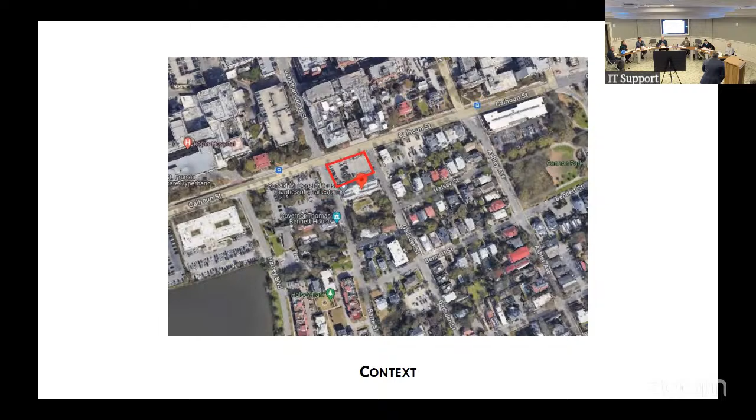David Bird, LS3P. We are working closely with HDR and the Department of Transportation for the modifications and widening of the Calhoun Street corridor for drainage. That's what it's being done for - also for safety on that stretch. That's actually the stretch right in front of our property, from Gadsden to Barre.

So there are some adjustments being made, and we can make the adjustments with them so that the sidewalks meet the TRC requirements, which is the city's requirements. There's one little area where we had a concern, but we're going to resolve it with them, so it should not be an issue for this, and it wouldn't change the design of the building.

The other thing I wanted to address before Thomas gets up to speak: the commentary at the last meeting revolved around really two items. One was the use of fiber cement siding, and the second was the level of brick detailing. We had scaled back on the brick detailing, probably overly so - there was a comment it was too much, so then we went back too far, and now we've brought it back to the level we think it needs to be, plus some of the activation on Calhoun Street and Gadsden.

So I'll just address the fiber cement. There's a materials board in front of you - we put a sample of the fiber cement here, these are the colors we're using, and then we put some example commercial buildings. I think there was a concern that it's not a material that's scalable to this size of building, so we found examples that show proof that it is scalable. We're also not using the siding in the normal way - it's not lap siding like you'd see in houses.

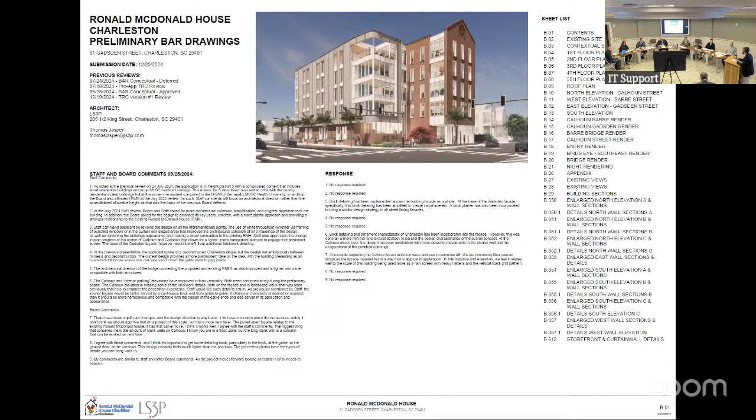Thomas Jasper with LS3P, architect on the project. Flip through to our renderings. As David mentioned, there were three overarching comments I think we focused on in refining and developing this design: the cementitious siding, the brick ornamentation, and the activation of the main streets - Calhoun, Gadsden, and Barre.

This image I'll use to go through how we further developed and refined the brick ornamentation. This is the corner at Calhoun and Gadsden - you'll see the previous design approved during conceptual to the left, and our proposed design to the right. We had cut this detail and brick ornamentation back a lot, in ways to focus more on massing and architectural direction, but also to lean more towards that postmodern character that is the campus of the Ronald McDonald site.

We agreed, and both the board and staff also gave us the directive, that it was a little bit too much. So in starting to develop and further that design, we first looked at the materials and what kind of brick we were going to use.

We used two strategies here. One, we looked to a tumbled look brick to relate more back to historic Charleston. Then we took that tumbled brick and applied it to the facade in a simple modular way, applying a more matched color to create a very simple mass facade. So it's much more textural - a traditional material being used in a more modern way.

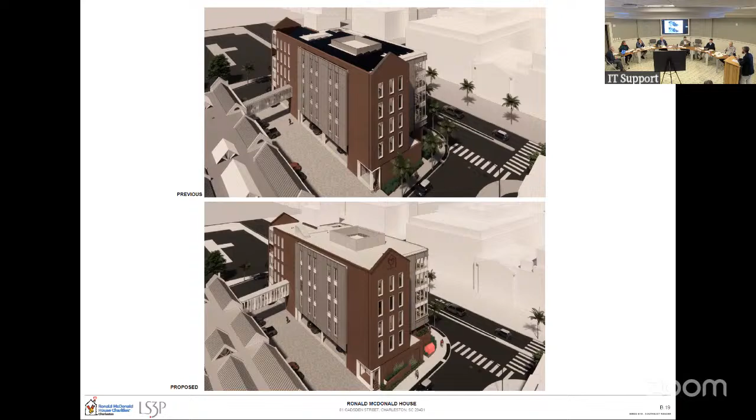This slide shows the two main languages and how they intersect. Next is the development of the bridge. I think we've covered most of the main comments brought up at conceptual, and we look forward to hearing what you guys have to say for the direction.

Questions? A couple. Yeah, go ahead, Mr. Banks. Thomas. Let's go to page B14.

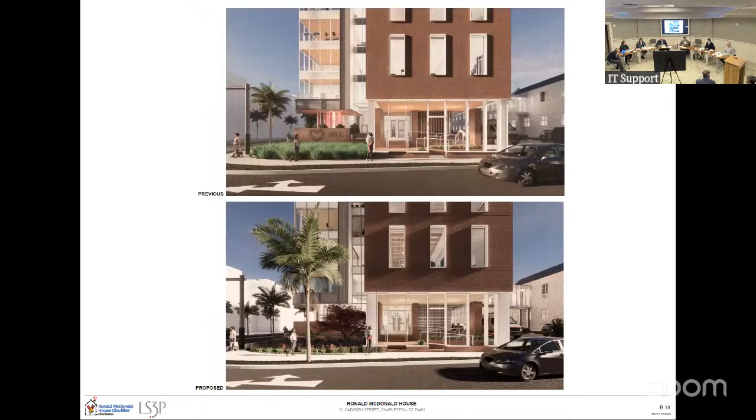I mentioned this at the conceptual review, but the emblem helps a lot at the top. But regarding the banding you added at the seal that wraps around the building, did you consider moving that up to where the gable starts? The emblem helps a lot, but when it was without the emblem in the previous version, it just felt like a tall plane there that didn't have a break where the gable end starts.

Yeah, I think I know what you're saying, where the spring point of the gable is. Would you do just a short return? I'm not trying to redesign it, I just want it to be something to consider.

We were actually talking about this earlier, maybe we could pick up on this banding. Because these windows are the same, and we have one that's got a little extra, maybe we could create some sort of double soldier course there. If you go to the next slide, it looks at it from the opposite side, same thing, very close.

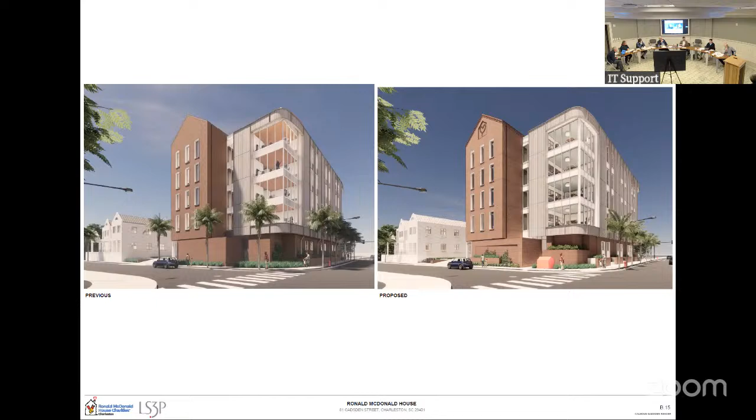I like the idea of it happening here. Can you go back to the other slide? What I like about this is it looks like the box is sliding out, and if we did the same thing here, it could stop as well and look like it just became the extrusion of the storefront. It looks like that used to be back here and it just came out, split out as a plane. That's a good thought.

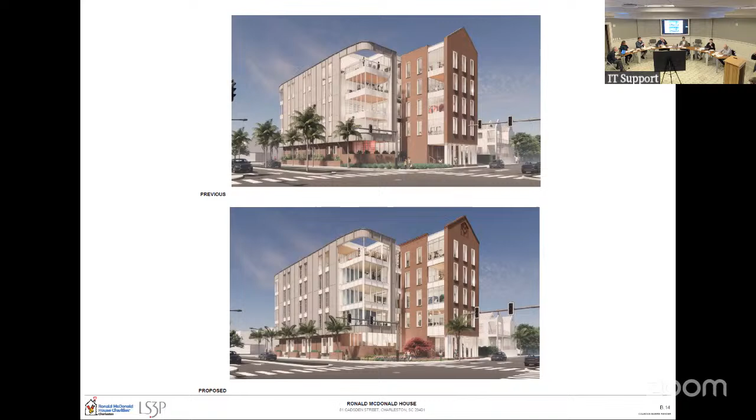On page B16, I was just wondering, because we eliminated the fourth window above, and by the way, I like the breezeway better, I think that's better, but I like the four windows rather than three. I'm guessing there's a programming reason why that had to happen.

We eliminated it at the top because that's where the stair wall is, so it didn't work out, but it could be spandrel at that floor and put back in the other places. Talking about the fourth window, the fourth column at the top, that's the problem, not the windows below in that column. But the problem is on the interior, and eventually we're talking about connecting to a future building at that location, the future phase point. So it's not a problem, I think we can put it back if you want us to.

Because the circulation of the stair is going to connect both buildings, and given that will happen sometime in the future, for right now that's a large section of brick wall that just gets left. At least that's what I think.

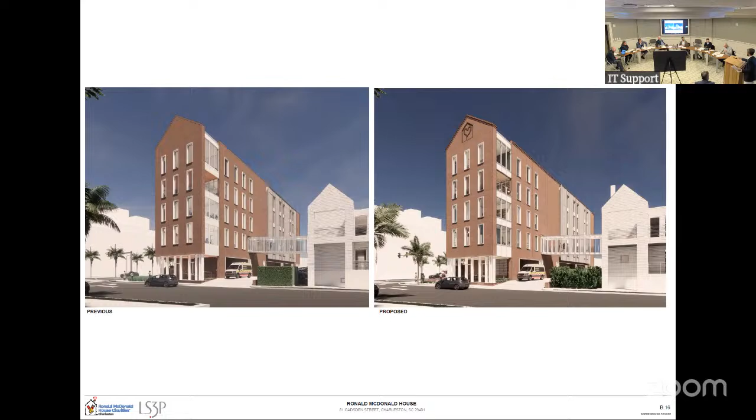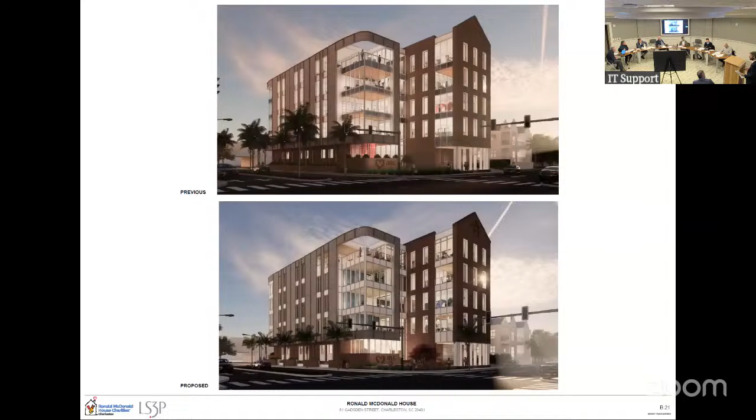Okay, and then if you could talk about what happens at the windows, where that detail dies into the windows. Talk about what happens at the floor levels where you have a horizontal joint. Talk about how you're going to make the round corner. And the wall section showed what looked like exposed nails, not sure if that's really the intent.

Do you know what sheet you're referring to, Steve? There was a drawing that showed cement panels with nails going into horizontal purlins. So is this the mechanism you were referring to on the base level?

For the battens themselves, we're looking to achieve those with a steel angle, then applying 2 5/4 battens that would protrude out from the facade. Those would be framing both in the horizontal and vertical, with a quarter inch reveal where that angle protrusion would occur for the sandwich. So from afar it appears as one, but it's actually modeled and rendered as two.

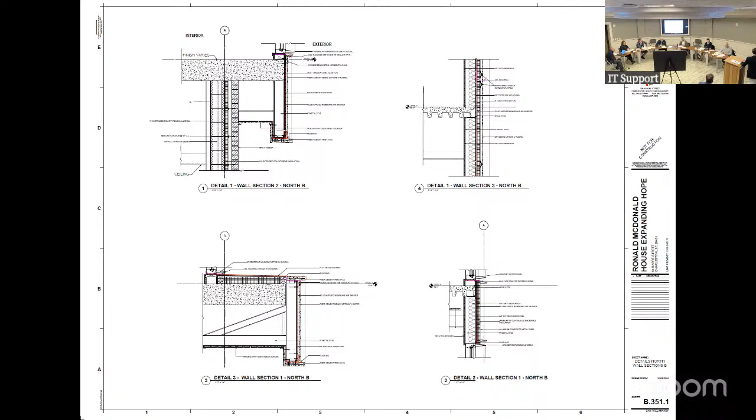Oh okay, you're speaking to the windows. Yeah, on both the storefront and the aluminum spandrel panel, YKK, Kawneer, and APCO make a mold cover that you can customize. So we're doing a custom mold cover that has that fin extension, and each spandrel panel would then have a fin to match. We're looking to mimic the look of a curtain wall in doing that.

In regards to your question on the field of vertical clapboards, we're using, and maybe it's detail 1 that was showing them, can you zoom in on that? Sometimes that's difficult to do in terms of what happens next with the computer, so I'm asking Lawrence not to. Are the nails concealed or are they not?

It's a V groove, basically a shiplap V groove, so the fastener would occur behind each of the laps, so they'd be hidden. Got it. And then that round corner on the nose, how is it going to be faceted, I guess? Correct, because I think it's either a 5 or 6 foot radius. So that's the point—does that work with the interlocking sections of that artisan channel and being able to rotate it?

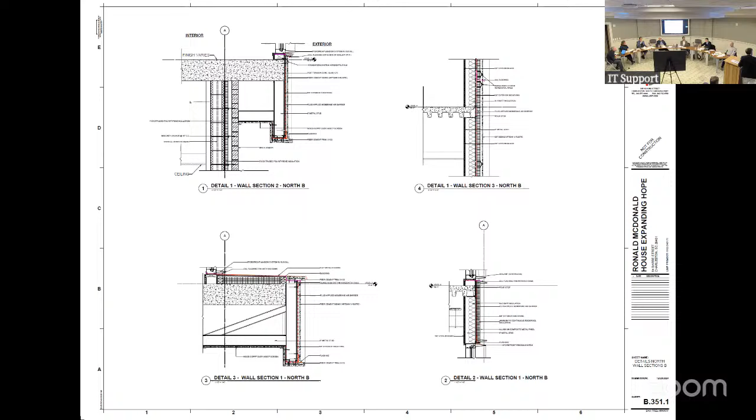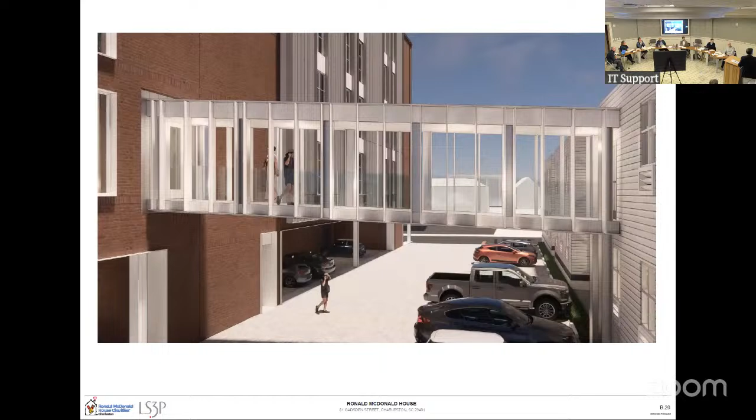Rendering's probably good, so the intent would be yes. I think if they could not achieve that, we could use a typical board and plug it, get the same look with just this view. I think they can extrude it at that radius, it's not like it's a big radius. That's what we're going to try to do.

And we haven't built this mock-up panel yet. I think we'll build a section of that to make it clear in the mock-up so we know what it looks like, because I want to know that it's going to work.

Well, thank you for answering those questions. Any other questions from the board?

One additional question too, if you could give us some insight into the materials and their colors, and how those were chosen, and how you feel they support or reinforce your architectural intent—basically the colors of the brick, the colors of the siding, and the colors of the panels.

Let's go back a little bit to the conceptual discussion. Originally all of the steel was black, and part of the comment was to make it more light and airy, more inviting for children. So the white steel relates back to the white facade of the existing building. Even the way the white bridge connects, it's almost more of an armature of the existing cutting into the new.

The brick relates back to the historic character of Charleston and also just something new along that facade. It also draws some connection to the MUSC campus just to the north, which is all red brick. The gray facade relates back to the gray metal roof of the building, creating a cohesive color palette for the overall campus, with the brick being the one kind of outstanding element.

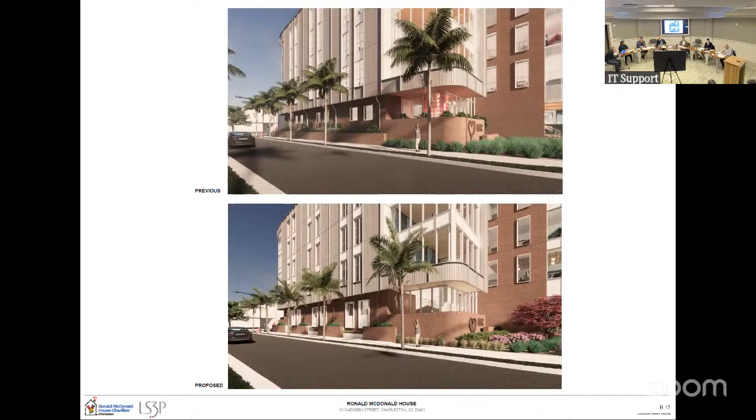Sure. Our first comment sort of repeats what the applicant has already said, which is that at the September conceptual approval, the applicant was asked to restudy the Calhoun and Gadsden Streets experiences relative to the blank walls for more detail overall, particularly in the brick areas, and to reconsider the use of cementitious siding.

Staff support the restudy of the Calhoun and Gadsden street level facades and experience. The planter boxes on both provide a good rhythm to the street experience, and the addition of soldier coursed inset panels on Gadsden also adds visual interest. Staff support the use of soldier course banding on the various brick facades to add interest, but not interfere with the overall vertical reading of the elevation.

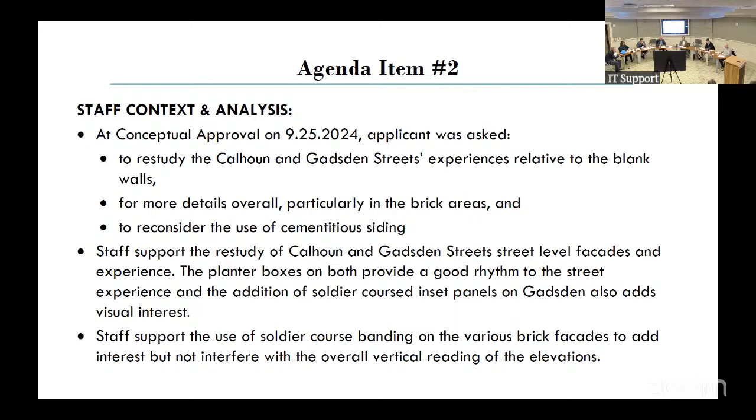Staff support the additional detailing at the cornices of the gable facades on Barre and Gadsden Streets. They provide a clear finish at the top. At the bottom of the brick gable facade on Barre Street, staff recommend adding banding or equivalent finishing moment.

The windows on Gadsden Street gable elevations are not evenly spaced. There is a larger space between the first and middle column of windows than between the middle and third. Staff know this was true at conceptual as well, but neither staff nor board commented at the time. Staff prefer that all windows are evenly spaced on this gable end, as they already are on the Barre Street gable facade. The south elevation previously had 4 columns of windows, as mentioned by Mr. Metters, at conceptual, and the current proposal has removed the windows that sit in alignment above the bridge. Staff prefer the previous iteration, which helps alleviate extended blankness on this facade.

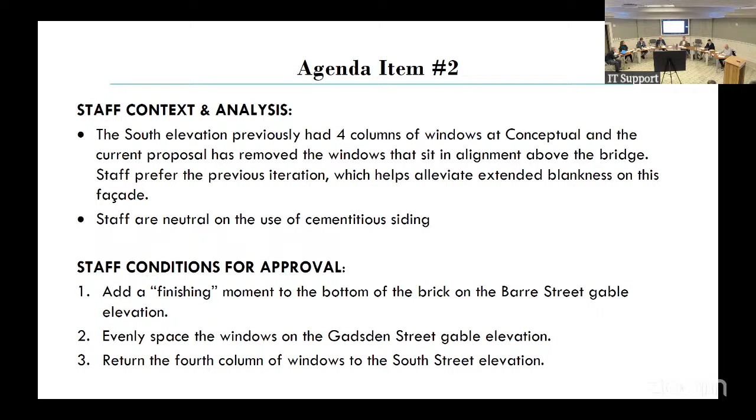Staff are neutral on the use of cementitious siding. Our conditions for approval would be: 1, add a finishing moment to the bottom of the brick on the Barre Street gable elevation; 2, evenly space the windows on the Gadsden Street gable elevation; and 3, return the 4th column of windows to the South Street elevation. Staff recommendation is for preliminary approval with board and staff conditions, with final review by staff. Thank you.

All right, any response from the applicant to those comments?

You'll step to the podium just so that they can catch you on YouTube. I have no problem with staff comments. We agree. We didn't even realize it's off a little bit on those gable end windows. We'll fix that. We can add the 3 windows back.

Thank you. All right, it's now time for board discussion. Does anybody like to start? I'll make a motion if any, unless somebody has a comment. Hearing none, go ahead.

I think the only thing I would probably bring up, and I think it's something to be resolved at final too, is with cementitious siding in its vertical orientation and ending of the board, the continuous length is nice. But what we've found sometimes is that it does highlight the flashing and drip edge lines, and brings in an element that's usually meant to be concealed, exposed. So I think as it moves forward into finalizing those details and mock-up panel, that should become a condition, that we kind of make a note of that if it creates an issue for someone.

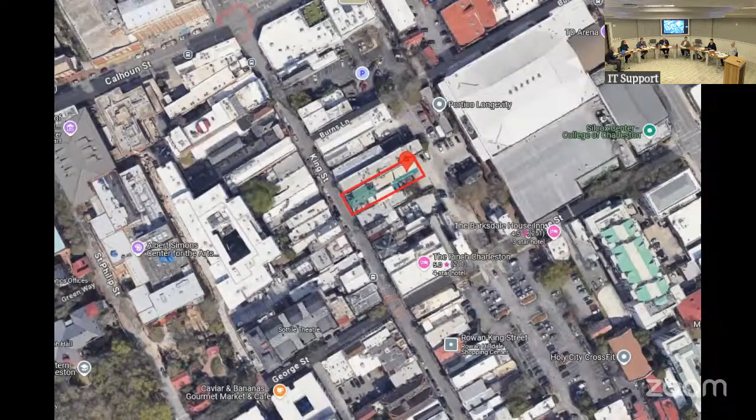All right, our next item is 348 King Street. It's a category 3 building, circa 1900, in Height District 3 in the Old and Historic District. The applicant is requesting conceptual approval for the construction of a new exterior storefront and vestibule. This just locates us where we are on King Street, and then we'll be ready for the applicant presentation.

Thanks for having me. My name is Olivia Lau from Height Architects. We are the design architect for the new tenant going into this retail space at 348 King Street. Attempt to use this. If you point it this way, it's the laptop. Oh, okay, yeah, there we go. As long as it's in this direction, it's usually okay.

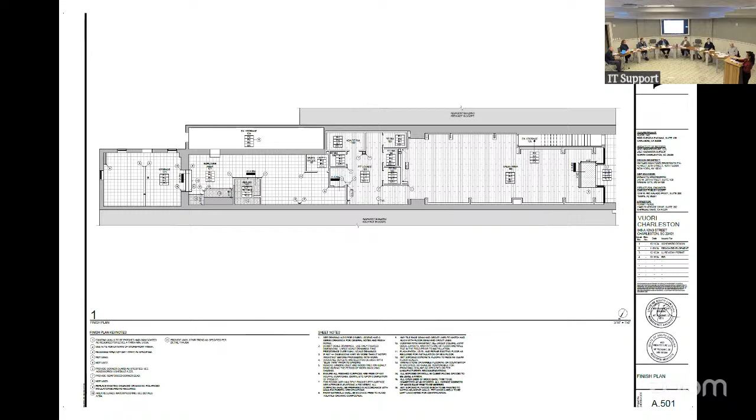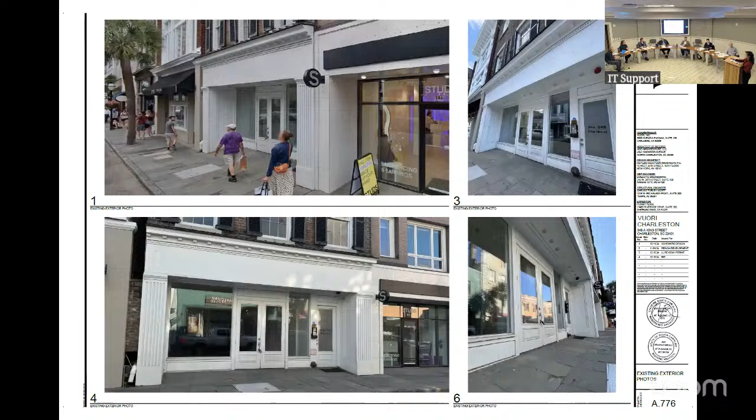Just trying to get to the context of the store on the street for you guys. This is the existing context on King Street. You can see it's one of the main commercial streets here in downtown Charleston. The current facade is in a sort of neoclassical style with cornice detailing, wood paneling, fluted pilasters. And so the existing grade, as you approach the entrance, as you can see in the lower right photograph, is quite a severe slope compared to the other stores along that street.

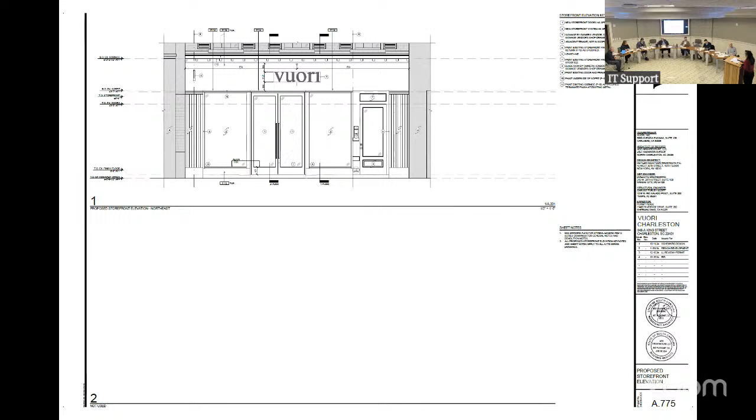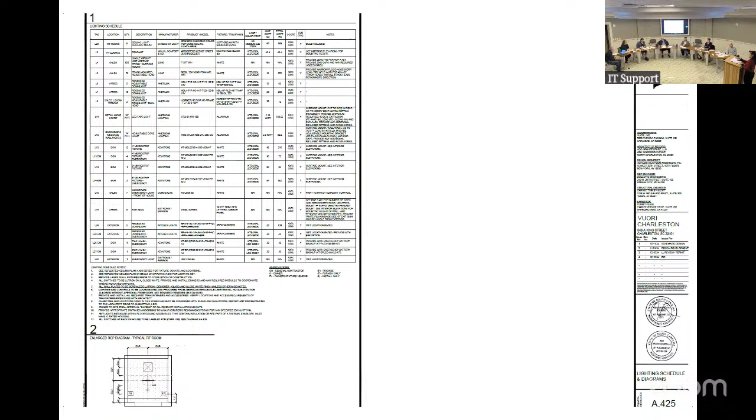Our proposal is to essentially refresh and improve the facade for the retail store. What we're proposing is to install a new off-white metal storefront, glass and entry doors, and new lighting in the vestibule soffit. We would push the entry doors back a little further from the property line to improve handicap access and provide an ADA-compliant slope up to the entry doors for customers. With the new storefront, we're also looking to improve energy compliance by installing insulated glass, and improve the durability and maintenance of the entire storefront with metal finishes at the retail frontage. Let's flip back to the proposed rendering so we can see a visual of what that would look like.

Thank you for your presentation. Questions from the other board? If you'll just remain with us for a second, they may have a few questions for you. Any questions at this time from the board?

Talk to us a little bit about the materials. What are the changes in materials you're looking at? The existing facade right now at street level is all wood paneling. We are proposing to keep the existing wood paneling at the sign band, the existing cornice detailing, and the existing fluted panels, just giving that a refresh with new paint. We would keep the existing entry door to the residential entrance for the units upstairs, and propose new off-white metal storefront mullions and entry doors with a metal base below the glass.

Okay, thank you. And the recess on that door, it's like a foot? The entry door is going back in about a foot. Right now, the entry doors are set back about 3 feet from the property line, and we would want to push the doors an additional approximately 2 feet back.

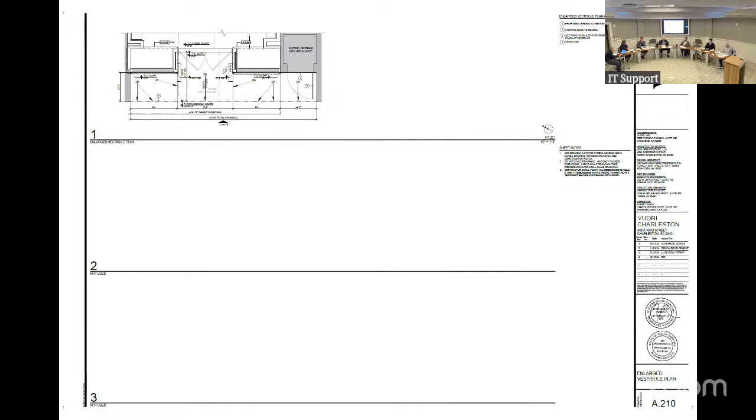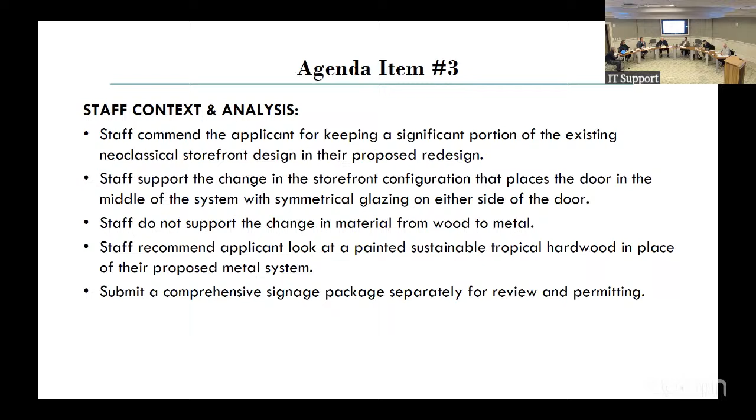Staff commend the applicant for keeping a significant portion of the existing neoclassical storefront design in their proposed redesign. Staff support the change in storefront configuration that places the door in the middle of the system with symmetrical glazing on either side. Staff do not support the change in material from wood to metal, and recommend the applicant look at a painted sustainable tropical hardwood in place of their proposed metal system. Since signage is shown on the drawings, the applicant would need to submit a comprehensive signage package separately for review and permitting. Conditions for approval: the new storefront should remain wood. Staff recommendation is for conceptual approval with board and staff conditions and final review by staff, if the staff condition is adopted in the motion.

Thank you so much. Any other comments or discussion amongst the board? Hearing none, I will be glad to entertain a motion. I'll motion for conceptual approval with board and staff conditions and final review by staff.